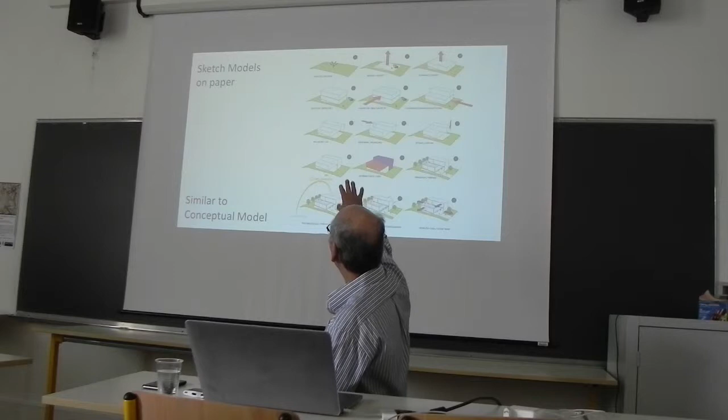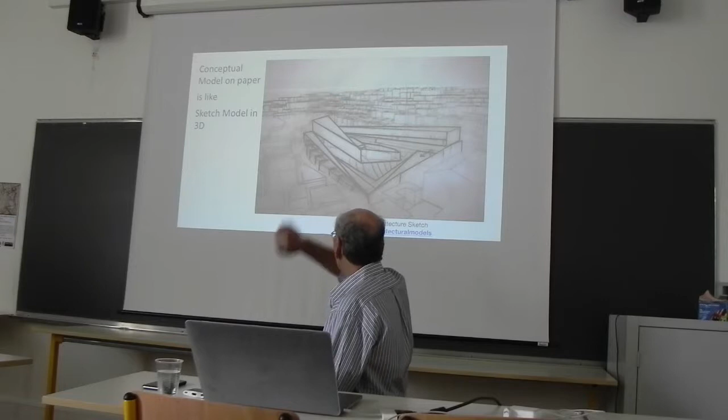So here's a classic architect, and there are no fewer than 3D models. You go to the architecture school and every place is chock-a-block with 3D models—everybody's generating them, all sorts. These are called sketch models—an early model you make before you have specifics, just to get an idea. It could be cardboard, paper, or folded foam core. You can have sketch models in 2 dimensions too, like that, and these are similar to conceptual models—early kinds, but blocky. These are also sometimes called mass models, where you drape cloth over the whole thing and ask, what does it look like from a mass point of view?

Now, Martha Tsigkari is one of my experts, and she's a partner at Foster's. She's really excellent at what she does. She's been teaching generative design at the Bartlett for over 10 years now, 12 years, and currently she's doing great work—the Mexico City Airport, a $5 or $10 billion building, amazing building. That's the one she came up with. So at Foster's she's doing very well, with a whole team, and it's quite interesting. I asked Martha questions, but we haven't had that much time together yet, so this is really early stuff for me.

In generative design, they always use optimization. I'll explain it in a minute. But how do you do it if you don't use optimization? That's a question I want to ask her. I'll explain that better in a minute.

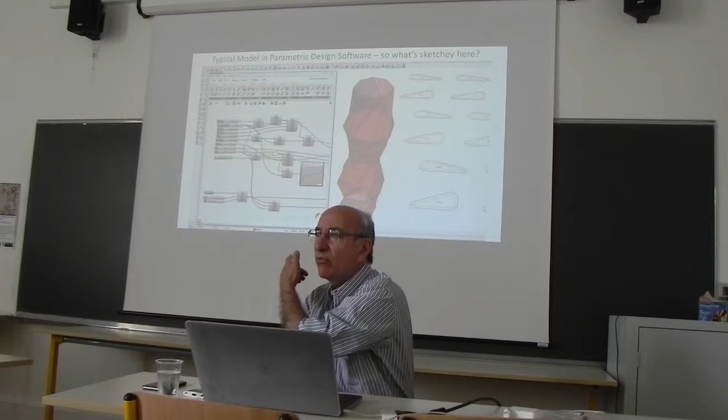So really, what I wanted to know was, what's the role of sketching in generative design? If this is what they are working in, and they go to this straight away, it takes them about 30 minutes to build one of these things, just even a quick one, maybe 15 or 20 minutes, but anything of interest takes 30, 60 minutes. And then you get this enormous power. But how can you think slowly to do it in this way when you like to write quickly and so on? So that's the question that I have.

And the reason I'm talking about generative design is because this is what's happening in life. This is what's changing now.

This is generative design, a technology that harnesses massive computing power, creating forms with precise amounts of material only where needed, achieving maximum performance while wasting nothing.

But generative design can be about much more than simply turning out alternatives. Prototypes can be scanned and equipped with sensors that provide real-time performance data that can be looped back into the design process, so the object, in effect, co-designs itself.

And depending on the material and method of manufacture chosen, the software can optimize the design for those choices. In its search for the optimal design, generative design creates complex forms that would otherwise be impossible to make using traditional manufacturing methods.

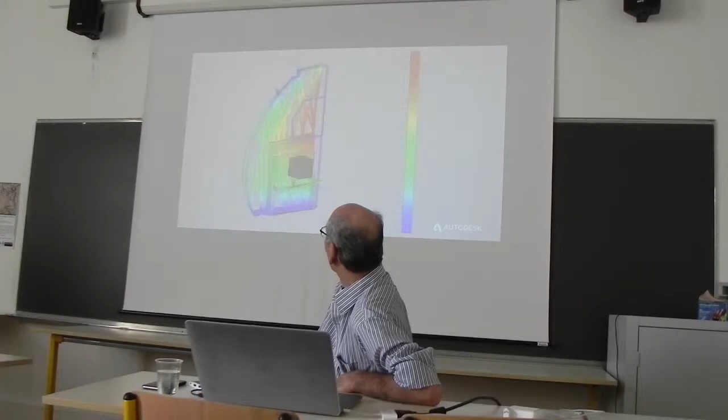Now, with advancements in material science and the ability of 3D printers to print metal, companies like Airbus can create forms like this airplane partition panel that's half as heavy and just as strong. The result? Significant reduction in fuel costs and CO2 emissions.

The things that have limited us in the past, software, materials, manufacturing, no longer do so. With generative design, the world can look and perform any way we want it to. This is the next stage in the evolution of design, and it's happening now.

So I'm working with Autodesk, and when I heard about this tool, I couldn't believe it. I don't know whether you were able to hear, but they 3D print in steel, in metal. So you can 3D print in almost anything now, and they even do it in biological things. So you can have the form, you have to have it in an appropriate manner that you can press the button and it converts it to the language for the printer, but obviously you can't get that from hand sketching.

So you can see the forces are driving everything in this direction, and then you can minimize the weight of things, and it peels it back and takes away everything because it has material analysis built into the system. So there's optimization along so many things: weight, strength, temperature support. All these are optimizations, and that's what's happening.

So Dreamcatcher, which is the name of that program, it was a project, but now they're starting to roll it out as a product soon. It uses algorithms and AI reasoning, and it generates thousands of designs.

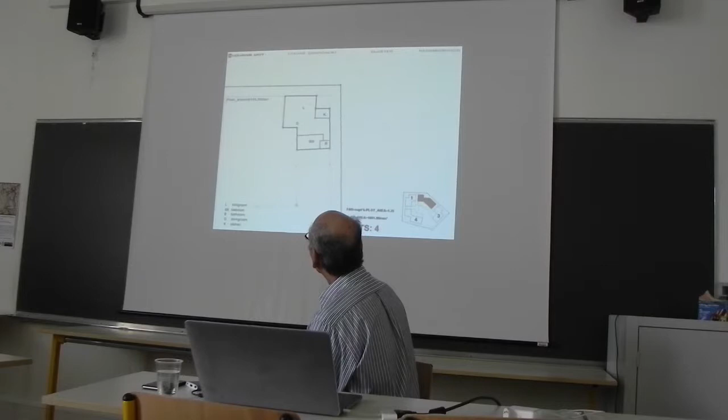So how does this relate to architecture? By applying conditions to the programmatic script, you can generate designs that accommodate different variables, for example occupancy, use, and light conditions, so we'd fix the size of the room. You can see the alterations in real time and allow the architect to pick a complex form that otherwise may not have been thought about due to the complexity of the design.

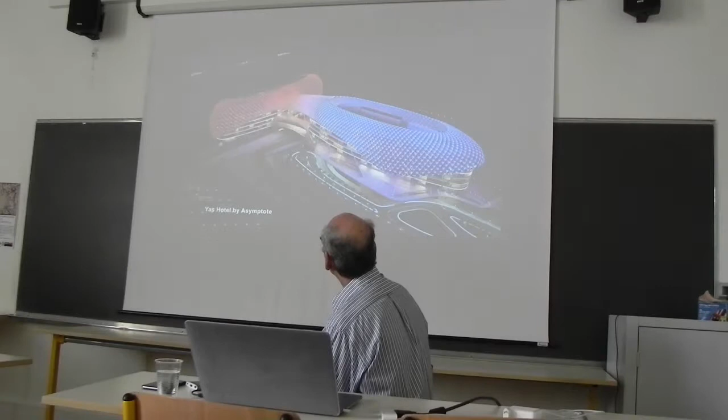One of the examples of parametrically designed architecture includes Beijing National Stadium by Herzog and de Meuron, Guangzhou Opera by Zaha Hadid Architects, and Yas Hotel by Asymptote. None of these previous examples would have been able to be designed or manufactured without parametric software.

And so now, what does this mean for the future of architecture? Here's what they look like. It is clear that a balance between that which is designed by and on computers, and that which is hand-drawn, must be struck in order to communicate ideas effectively while still continuing to design complex forms.

With this being said, it's worrying to think that with parametric software, the architect can become more of an inputter of numbers rather than always a designer in the traditional sense. They were concerned about the same question, about the role of human creativity without hand drawing, and the loss of that in architecture when you're manipulating and pulling levers and stuff.

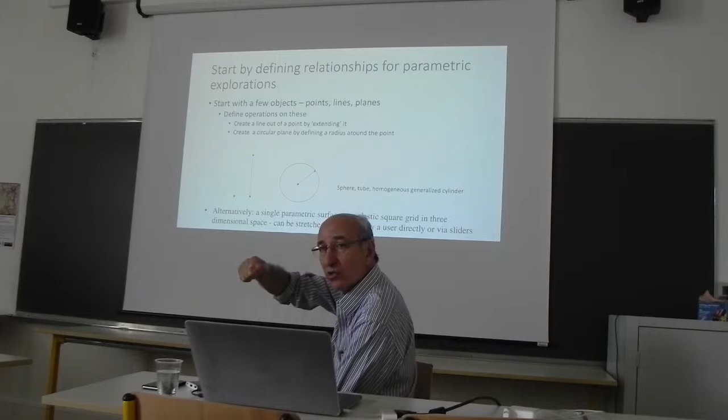Coming back to generative design and how parametric works: you'd start with, you drag down like in Photoshop or something, some things you want like points or lines, but anything else can often be defined in terms of it. So you could start with a point and say, I want a line, and just make it go forward. That's an operation on a point.

What you do is you take these things and you perform operations. Because they have these crazy operations now, people build new modules that you plug in and they perform new operations, such as folding. Here's a column. I want you to fold it on the x-axis, fold it on the y-axis, and you're folding it inside, and then you produce those crazy columns.

You never would have guessed anything could have come out of folding like that. Then people invent new operations, and you get shapes that you never dreamt of before. So you define these relationships, and then they multiply things.

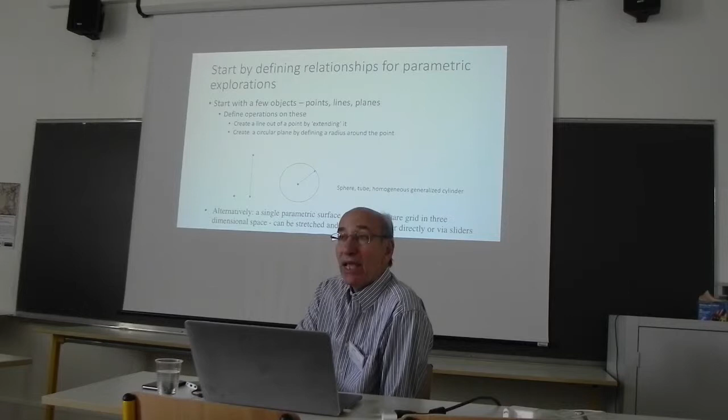I asked Martha about this, because I've worked with the Dreamcatcher product, mostly for product design, but it's coming for architecture eventually. There you say, okay, I want a chair. If you wanted to design a chair, you wouldn't say much. You'd say, okay, if the space of the chair is going to be like a column, I'm just going to tell you it occupies this space. I'm not telling you anything more about it.

And it's got to have force at about this height that'll handle enough, say, 200 kilograms. Enough force up there. Maybe I want a back, maybe I don't want a back. I'll specify if the back has got to push back on you, and it connects the back, maybe a connector, or it's either a solid piece or it's a connector if it wobbles. That's all I tell it. I don't tell it it needs legs.

Just a question: if you can change parameters only with the slider? Yes, the slider, you have lots of sliders, they can do lots of different ways of doing it. In fact, I was going to show you one thing where now the next thing that people are doing is Oculus Rift, it's virtual reality.

So what you do then is you walk around and the sliders are in the world. I want it this big, and now you say it like that rather than do it that way. So the input space is changing. It's happening fast. It's amazingly fast.

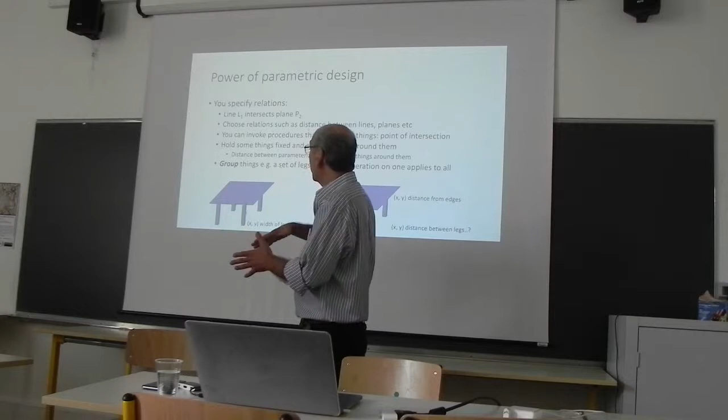So here I might choose the distance between the legs as important, a parameter that I could change, or the distance there, the distance there. I could choose the width of the leg as important. And now I could ask it to generate in this space. I've given it no optimization yet. I'm just saying, let's look at possibilities. And we can hold some things fixed, or we could not hold things fixed.

And the surprising thing about this is that when you ask it to do that, it can come out with outcomes that are amazingly different. So here I did this, I mean I was just thinking about it myself. So I could have essentially, there are 4 legs here, right? But I changed the width until finally they hit each other, and it produces the equivalent of 2 legs, like that.

Over here, if I didn't just control the distance from the end, the corners, I controlled the distance of the corner and I controlled the distance at the bottom, then if I can allow the bottom to go negative, I can have them cross over. So you can get crossovers. I can get a single leg in the center, and I can get all these combinations, many combinations that are completely not what you'd be expecting when you start with 4 legs.

So this is how you can generate interesting design. Now, you don't get one of these, so there are lots of chairs you're not going to get, lots of chairs you're not going to get, but you do get a surprising number of chairs.

All right, how am I doing for time? Sorry, my timer was off. I can't get it on. Okay. Sorry, black cursor on black screen. Nope.

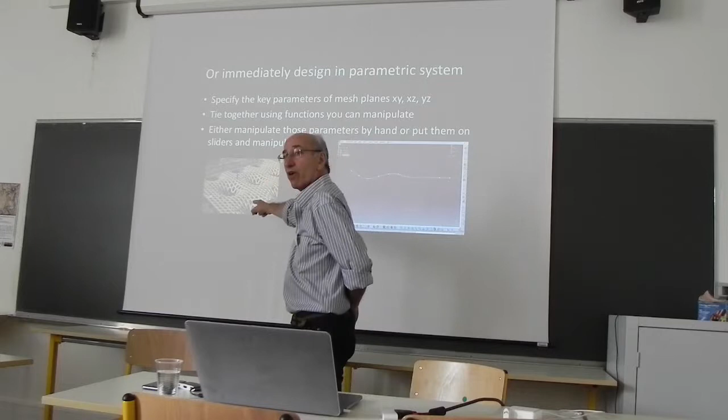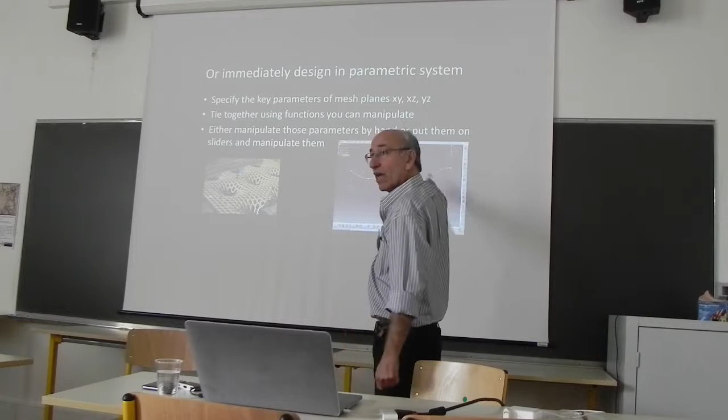Now, what you would do is you go into your modeling program without doing the sketching, and you would put the parameters together, tie them up the way you want. Then with something like this, you can manipulate it and it changes the shape over there in accordance with these. So now you can introduce any shape in X and Y that you would like.

The newer school: you specify some properties of the surface you want to optimize. You say, I want this roof to perform well under high wind, do well under snow, take the rain off, or reflect heat effectively. The system converts these into a goodness function, takes a parametric surface, substitutes in different numbers, and each time gives you a shape and calculates how good it is. That's a big change, because before you had to build the shape yourself and calculate the goodness. Now it's doing it in the background, only showing you the shapes that are good with respect to these parameters. Imagine all the work it's doing for you now.

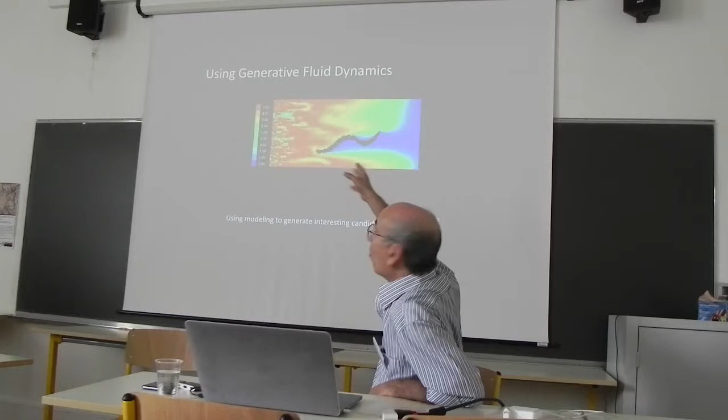This is what would happen. They use all these different physical processes built right into the programs now as little modules that you plug in. Here's fluid dynamics, and they use fluid dynamics to generate interesting candidates. You can watch it happening. These are different methods for doing it—this is the second optimization method.

By the end of the course, they would be able to design a roof for these things. The surprising thing is that roofs now don't look like roofs used to. You saw what the Yas building was like, you saw the other buildings—the roofs are completely different.

So that's how you would use it, and it's performing these analyses underneath. These are all dynamic, animated sketches. But how you create the sketch was not with your hand.

Creativity is usually treated as happening substantially in the generative phase, where you come up with interesting candidates, then prune or selectively choose among them, learn from the outcome, and feed back into the generation phase again. By exploring the space so massively, these systems are not constrained by the past—they're always reframing the question. Because they search the space so largely and effectively, you get a big separation between the candidates being considered, whereas humans do not usually search extremely far apart.

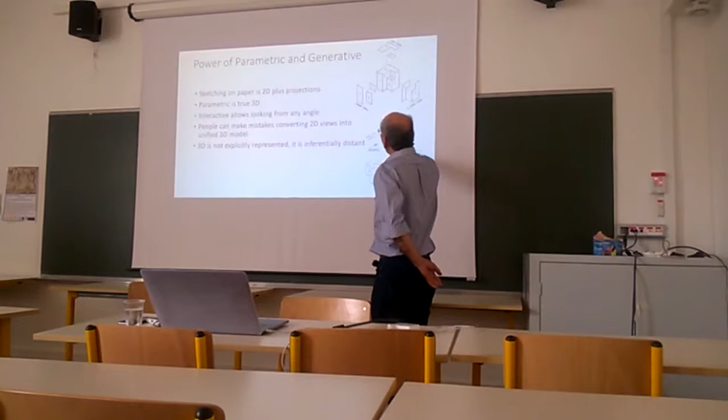I don't know what any tests on that have been for dentists, but I know that they have to do this, and the place where they test it before you go to school is in dentistry, to see how good they are in these projections. But you'll notice that this is what they are - you get this one and you get that one, and you have to be able to put those 2 together to come up with a shape like that.

That's not so easy, right? You could have inconsistencies where, in fact, you try to put the projections together and they're incorrect. So errors can creep in there. I would like to think of these multiple projections as an inexplicit way of showing that.

And you really want a 3D shape, especially when you could rotate - that would be a much more explicit thing, where now interactivity is part of your relation to the object. So the parametric model is a true 3-dimensional model. So right away, you've got a big bonus by going to a parametric or a 3D modeling over a hand sketch.

It gives you honest 3D, and you're not going to make mistakes. The interactivity allows you to look from any angle. Well, that's certainly a powerful thing. And where people can make mistakes in unifying them, they won't make a mistake because it's completely explicit - the 3D in a two-dimensional model is not explicitly represented, but the 3D in a 3D model is explicitly represented.

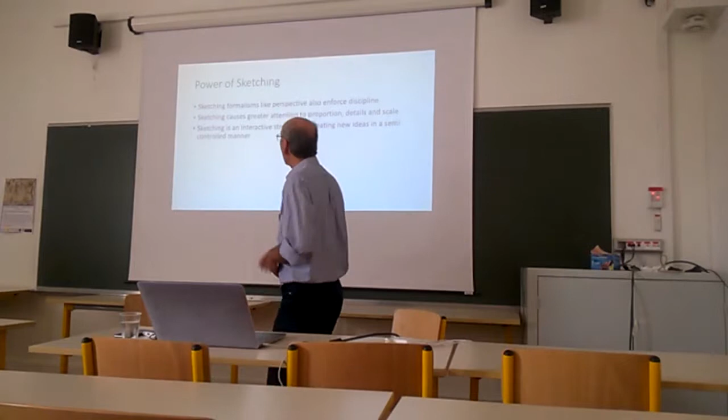So we seem to have a lot of arguments for the automatic methods. What can we say for sketching? Sketching formalisms, like perspective, still enforce a certain discipline. You have to put things into perspective, and that forces you to think in a certain way.

More importantly, sketching causes greater attention to proportion, details, and scale. I can define a chair as a set of parameters, but I haven't really understood the nature of the appearance or the relation between the scales. If I specify that the back should be the same height as the base, that may look good at certain sizes, but not at others. This concern with scale and proportionality is a very human thing, and sketching allows you to explore that space in a way you might not explore with parameters, because you don't have that kind of control.

Sketching is an interactive strategy for creating new ideas. That's the one we're quite familiar with, so I want to explore some of that. Intuitively, when you think about sketching something, you have some idea.

Say I want you to design a chair, again we'll stay with the chair. Before you come to the piece of paper, you have some ideas about what you're interested in doing. But when you get to the paper, something changes. You have some ideas, you're imagining some possibilities, but probably not to the resolution you'll have once you're at the paper. And when you're at the paper, you just made this stroke. How do you continue from this stroke to conform to your imagination in some way?

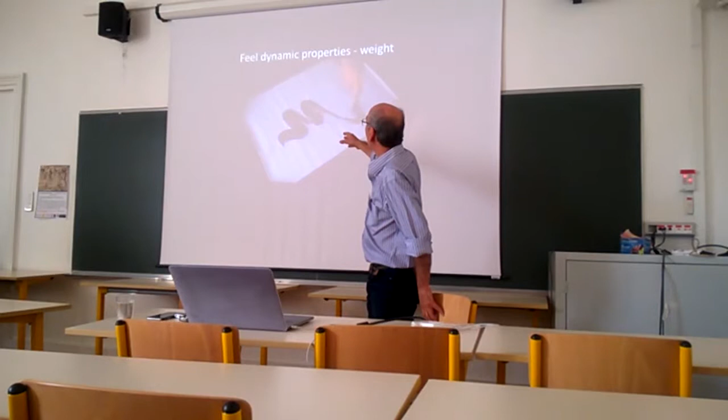Now here is the feel of dynamic properties. You can see the weight, surely the calligraphy and the nature of this. This is Japanese. It's all about weight and movement. So that's got to be some component of a curve. I could do the curve like this, but I do it like that in order to get the dynamics of the curve. And that's going to be something embodied, something you won't get through parametric design. The feel of something is what you're trying to get into the building, for instance.

Relentlessly ambiguous. This is a property that is counted on in using sketching for creativity. This is nothing new, I believe.

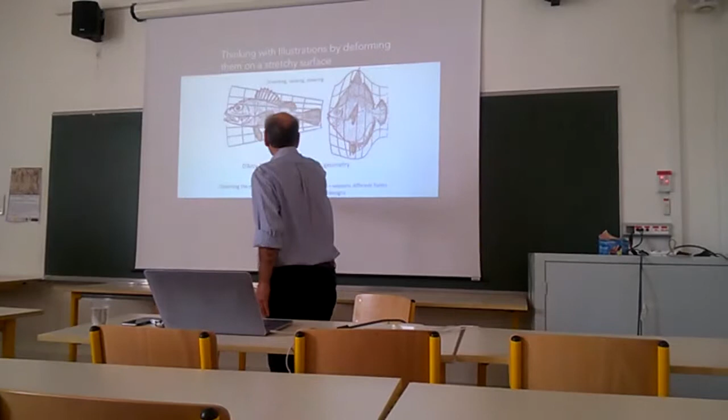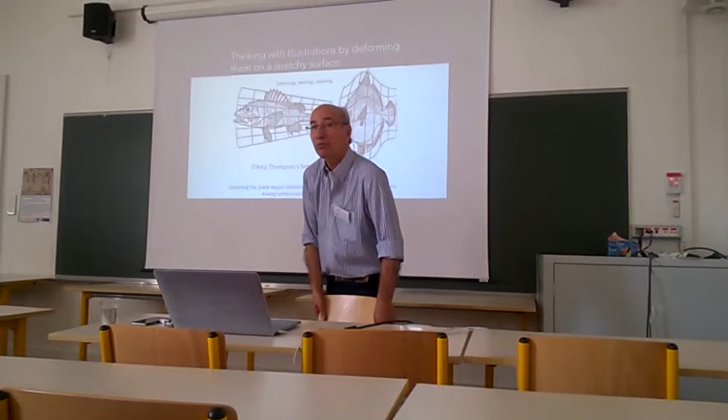Here, I just appreciated that this is analog computation of parametric designs. This is the famous D'Arcy Thompson stuff—many of you must know him. He was a great polymath, a professor of 4 different fields at Cambridge, and he did math and biology.

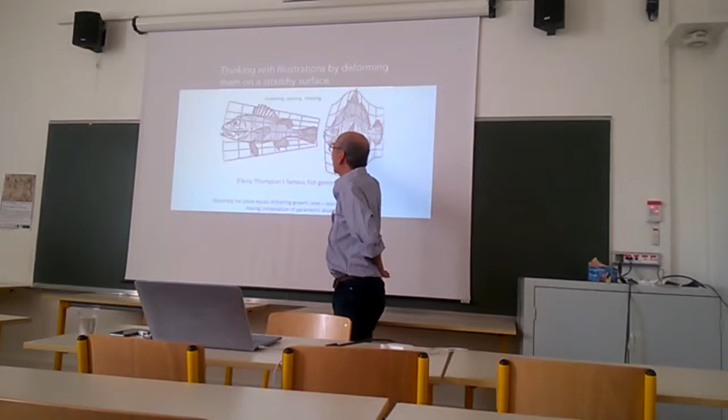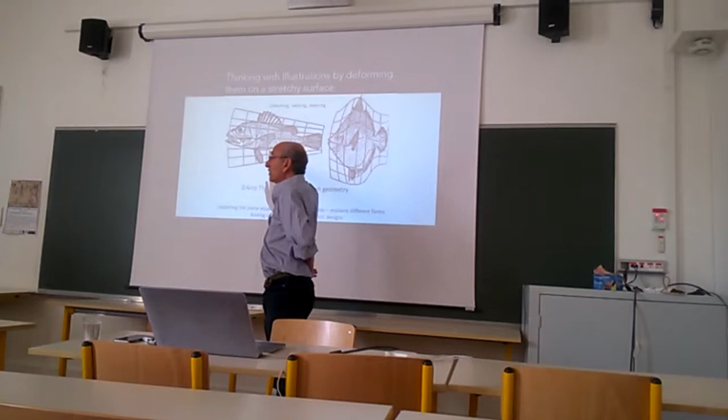This was kind of his counterexample to evolution, because evolution assumes the causes of these changes would be genetic causes. But he was very keen on looking at the importance of development. You could have the same genetic basis, but when this was a little fish, if you fed it in a certain way, it might come out like this, like a foie gras, if you fed it too much.

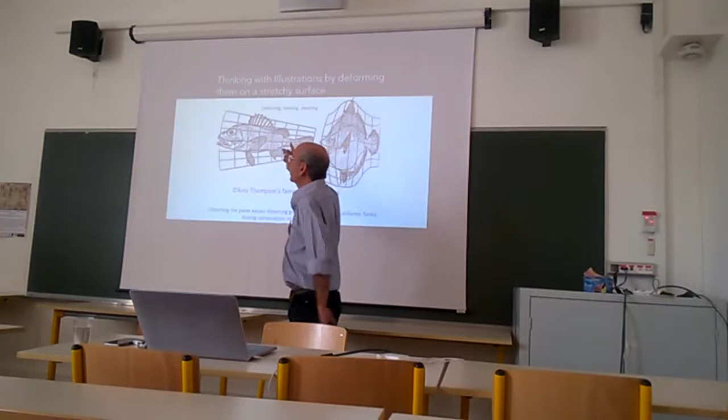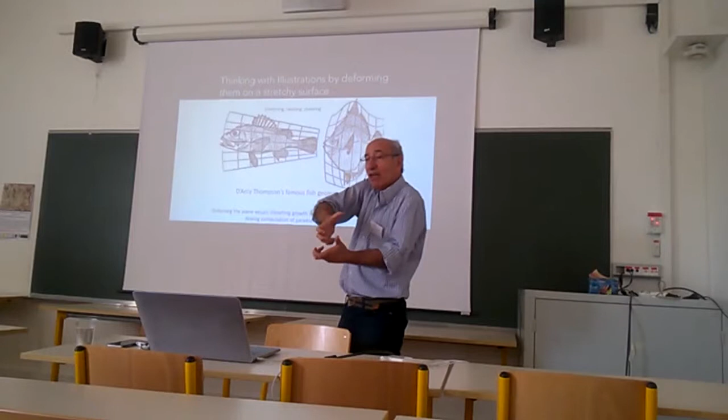His genius was to mathematize it and say, let me look at the operations I can perform on a geometric surface. I can shear it, rotate it, stretch it, dilate it, do various operations. And let me perform that on this rubber sheet, and I can produce these different creatures.

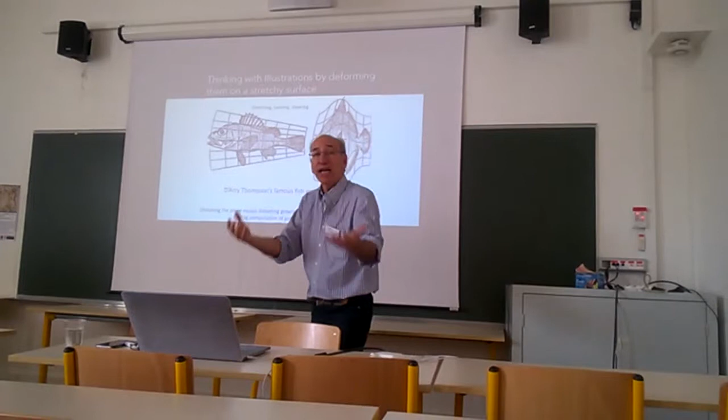So that's one way people physically play with ideas. Gehry crumples the paper, and you could crumple the fish to get ideas. But they can do that parametrically.

These are different ways that, in fact, architects in the old days worked with diagrams. They used to rotate them, occlude parts of them, stretch them, move their heads, come in like this. These are all embodied actions they perform with respect to the sketch.